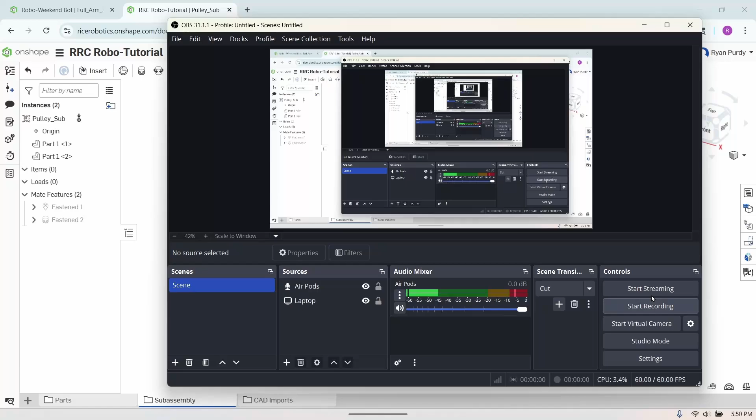In this video, we'll be moving on to our second subassembly as we work towards a full assembly of our robot arm. And this subassembly will be between link 1, this rod, and the servo horn that connects to them both. So we'll be making use of more fastened mates just as we did in the previous step, and we'll also be using a new kind of mate called a group mate.

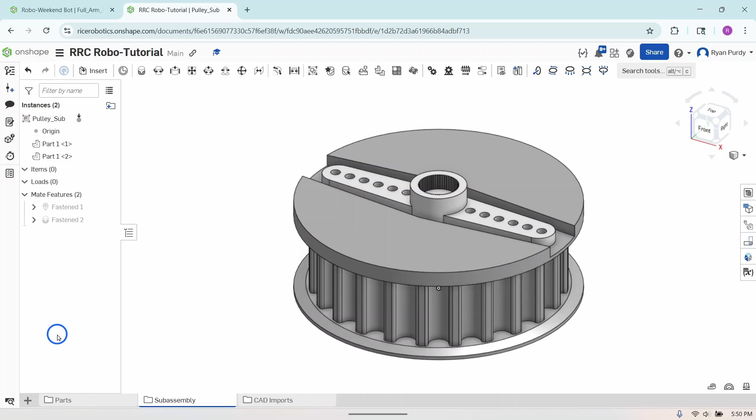So back in the Onshape document, create a new assembly from the file select. And we'll start by inserting all of the parts that we need. So we need to insert link 1, click in the dialog, and then drag out and click again to place it in the assembly, and then we'll include the same servo horn as before.

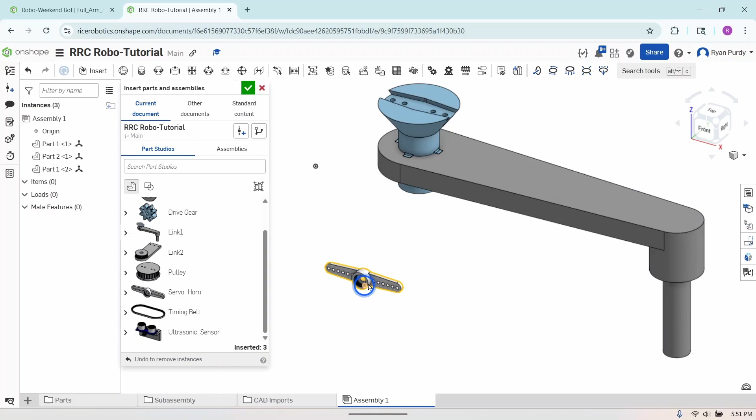So note that we don't need another servo horn file, because every time we pull this servo horn into an assembly, this is just going to be another instance of this part. So it's not like we need to import multiple servo horns if they're all identical. We can just use the same file for this new subassembly. Click the green check mark to finalize the selection.

Now, the problem, before we start adding the fastened mates, just as we've done before, we're going to have some issues with these two parts. They're separate bodies. They're in the same part studio, but in that part studio, they're separate bodies. So if we grab this rod and we drag it, it can totally move independently of this other body. But we don't want that because the way that we designed it originally in the part studio is exactly how we want it to show up in the assembly.

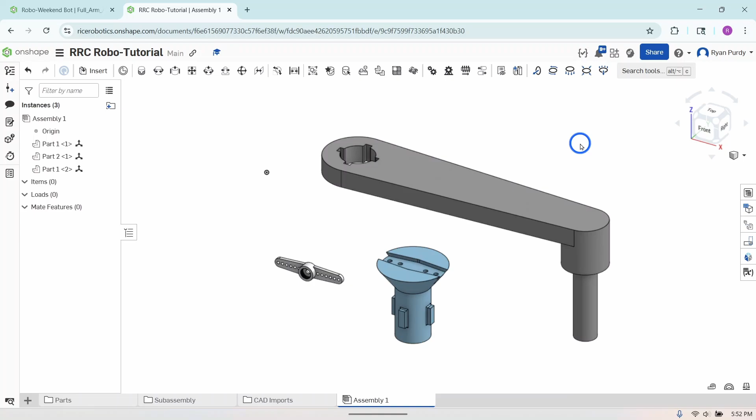So you can go about two different ways of fixing this. Either you can add a bunch of mates between link 1 and the rod just to make sure that it's always locked in its initial position that it has in the part studio, where this rod is always inserted properly inside of link 1. Or we can use what's called a group mate, which just acts between two or more bodies. So we'll go ahead and start that now.

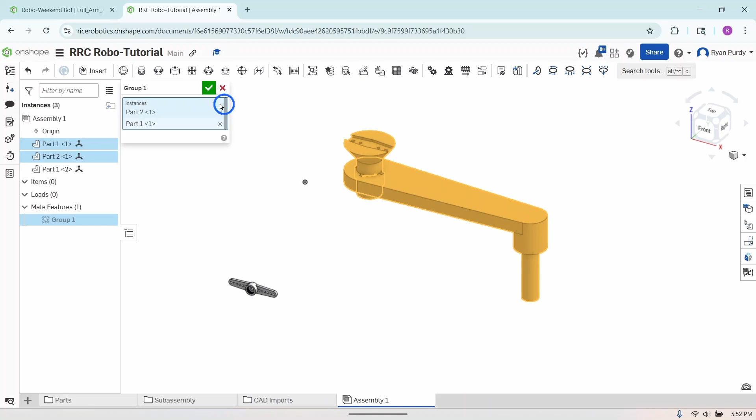Up here in the assembly toolbar, there's a group mate here. Select a group mate, and then you just select all the bodies that you want to include in the group. In this case, just the rod and link 1. And by grouping them together, we make sure that they'll never move independently of one another. So hit the green check mark. And now with this group mate, if you once again try and move the rod, the two bodies will always move together.

So if this wasn't the configuration that we wanted, if we wanted to orient the two parts differently than we did in the part studio, that would be fine. We could totally do that. But in this case, since they were already in the proper positions, the group mate is the quickest way to deal with properly orienting these parts with respect to one another.

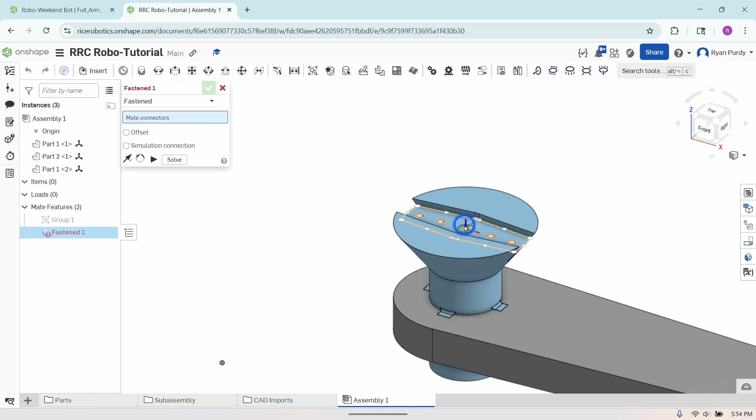So the group mate has been added, and now all that's left is a few more fastened mates, just like in the previous subassembly. So first, we're going to fasten this top face of the rod to the origin. So in order to complete this fastened mate, we're going to first add a mate connector to the center of this servo horn cutout, just like we've done before. And we want this mate connector, this position, to coincide with a mate connector at the origin.

So we have one mate connector here. We're going to place another mate connector to the origin. You'll see that they move so that they are in the same position, and they're fastened to one another. So if we finalize that mate, then we click and drag link 1. It can no longer move because it's fixed to the origin, and so it has no more degrees of freedom with respect to the origin.

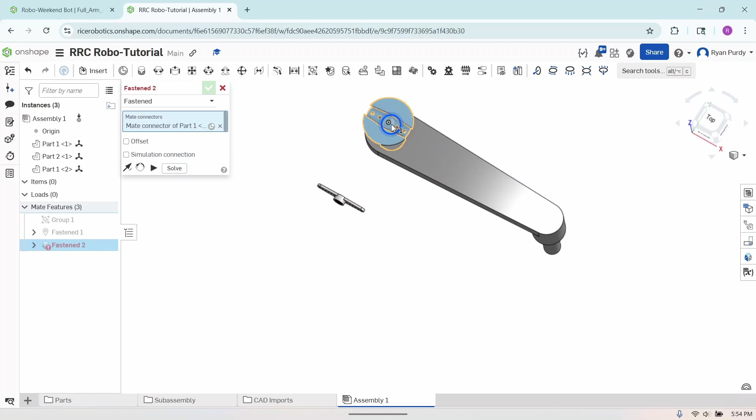So now we will add one more fastened mate. It's going to be between this servo horn cutout and the front face of the servo horn, just like we did before. Remember, if you select the front face, it's going to place it in some weird position, but if you select this circular edge, it places it at the center, and you'll see it snap into place.

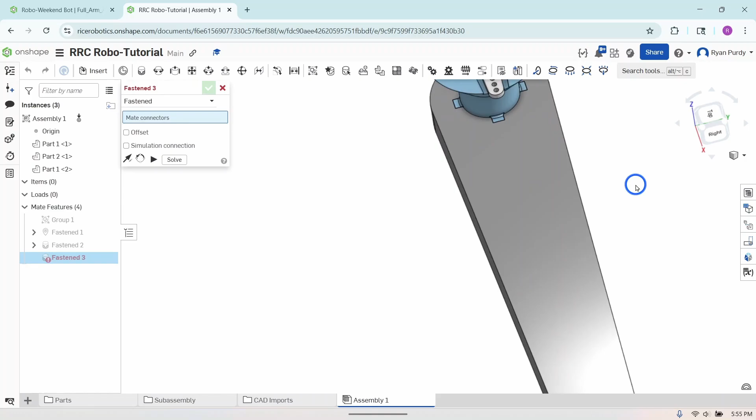Just like last time, it is oriented incorrectly. It's phasing inside of this rod. Hit flip primary axis, and now it looks correct. So finalize that mate. And now that looks good. So this is our second subassembly done.

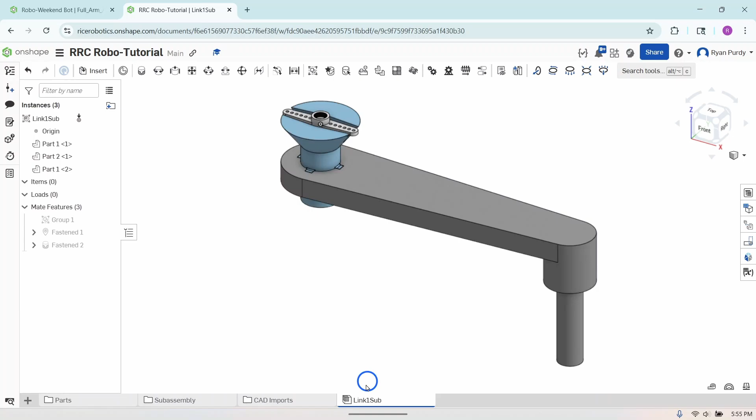So the subassemblies go pretty quick because we've already CAD'd all of the parts individually. Now we just need to apply mates between them so that they are fully defined in their subassembly. So if you click on any part of this assembly, it's fully defined. There's no additional degree of freedom for any of these parts. So name the assembly appropriately. Make sure to sort that subassembly into the subassembly folder. And now we're ready to move on to the next step.